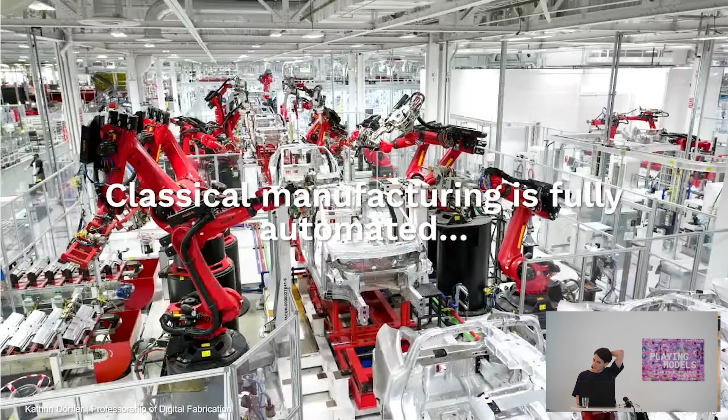This is an image that is often shown in our field, our role model of full automation. In building construction, the role model would be classical manufacturing industries, such as the automotive sector, where the production chain from design to final assembly is largely automated. We often put forward this picture as sort of what we want to achieve in building construction.

However, we've learned over the years that building construction is not directly comparable to classical manufacturing industries. The built environment is intertwined with the material reality of society and geographic locations to which it belongs. So it's more difficult to centralize, to streamline. It's dependent on availability and supply chains, as we heard yesterday from Mariana, on legal framework conditions which heavily inflict on it, as well as industrial practices, technologies, and skills so far.

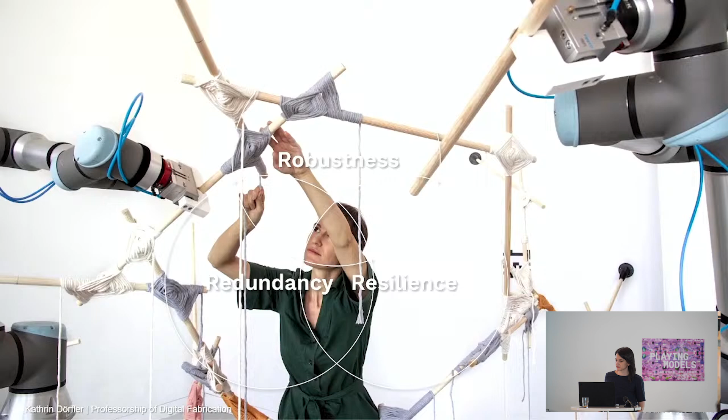So the research in my team tries to take a more nuanced take on robotics and automation for building construction. Also big words: robustness, redundancy, resilience, something that is underneath the projects we are doing. We're trying to understand how we can flexibilize processes, how we can make them not optimized but more redundant and resilient.

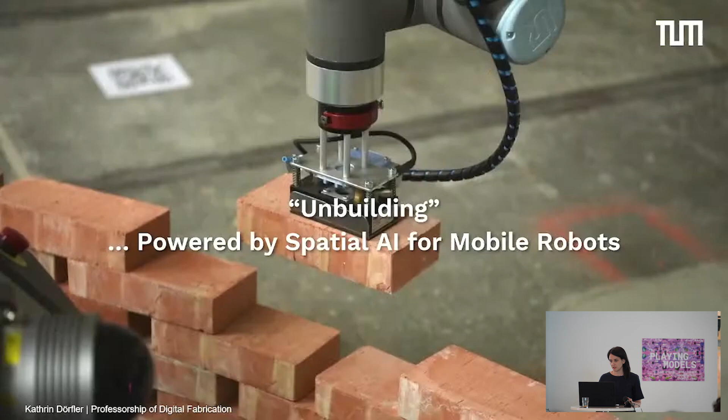And what I mean with this, I will show through a range of projects dealing with bringing humans into robotic fabrication procedures. I'll start this lecture with one very recent exploration we're doing. It's called Unbuilding, and it looks into how to carefully take buildings apart. It's a PhD topic of a researcher in my team, Begüm Saral, in collaboration with Stefan Leutenegger, professor for machine learning and robotics. The project started by observing typical end-of-life scenarios for building structures today.

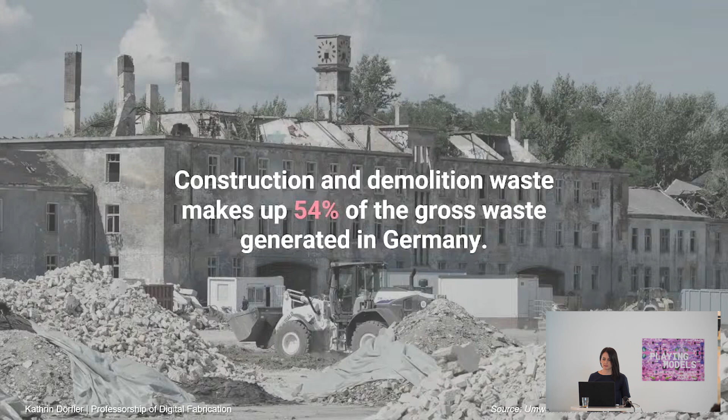I think we've also seen this multiple times: construction and demolition waste makes up a majority of gross waste. This specific number is from Germany, but I think this is a problem worldwide. It's a lot of building material that turns into construction waste and never gets another chance to be part of our built environment.

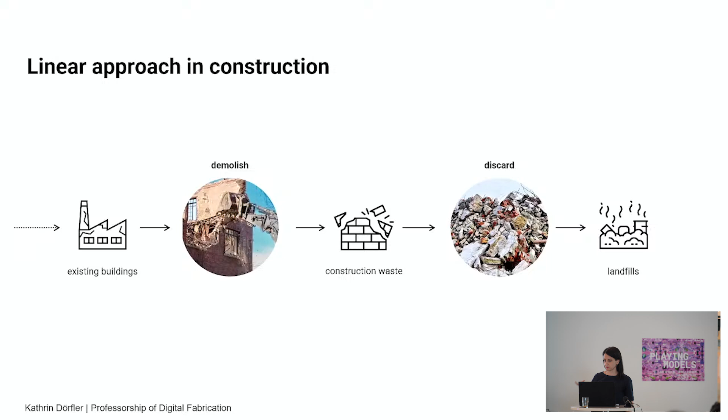Current linear approaches involve demolition with destructive machinery, resulting in large amounts of construction waste being discarded in landfills. This would be the linear approach. It's preferred today because it's labor and cost effective. However, it undermines the potential for reintroducing materials into the cycle.

So what if we would deconstruct our buildings with the same care and deliberateness as we construct them? And how could that help us reclaim materials in their entirety through disassembly, without actually destroying them?

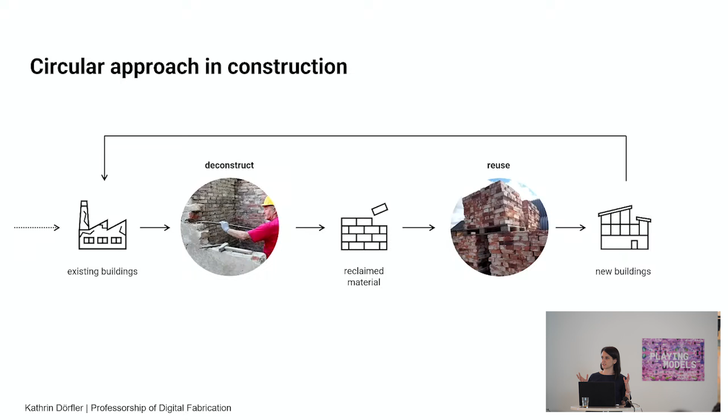This is very challenging, not only because of the robotic processes, but generally because our modern buildings are built very complex. They're glued, mechanically connected, and so on. So it's not very simple to do that.

And when we look back into history, before the industrialization of building construction, this was of course common practice. Salvaging materials and reusing them, especially in masonry and brick construction, has been a very prevalent method. The question is, how can we learn from this? How can we reclaim this, and how can robotics or digitization also help us do so?

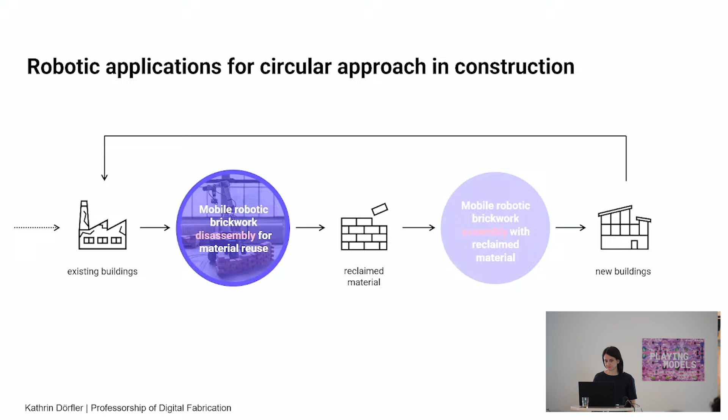So we have set up a very, very simplified case study, starting from very simple conditions, where we look into brickwork disassembly as a simple and maybe pre-industrial case for taking buildings apart. Then maybe later on we can see how we can basically take that material back into the cycle.

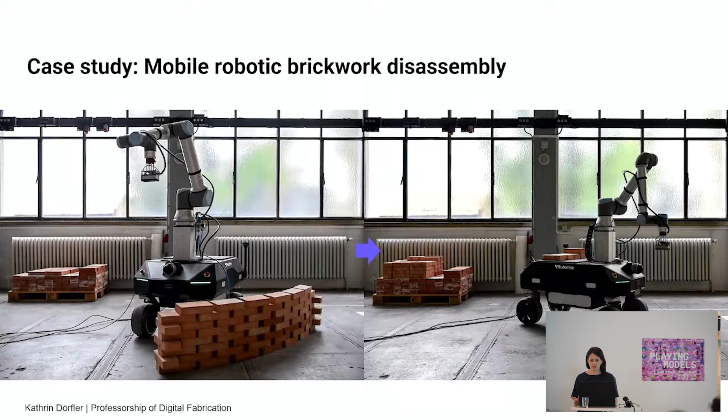So we've set up a very simple case with dry stacked brick, without any mortar bonding—just the mere brick. In contrast to a typical assembly scenario, where we have a digital model and a building plan, and make either people or robots construct buildings at very specified locations previously determined in plans, when we disassemble, we actually have to start from a place where we work with found situations and then derive actions from these found situations.

So something that later on, maybe, that's a speculation, could be helped much more also with large language models or visual language action models so far.

Anyway, we start simple, so we actually utilize spatial AI, spatial artificial intelligence, that focuses on understanding and utilizing spatial information, so geometric and semantic information, enabling robots and systems to comprehend and interact with the physical environment in a manner that mimics human spatial awareness. This makes it particularly fit for working in existing contexts, especially in found situations, where material reclamation and subsequent reuse could be utilized.

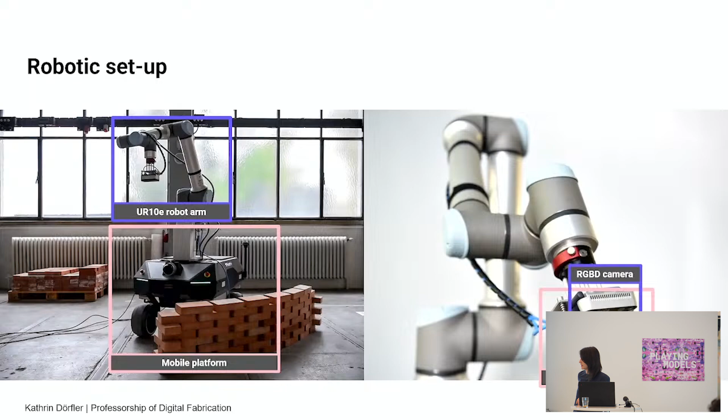So we have this mobile robotic setup. It's equipped with a eye-in-hand end effector, so a vacuum gripper and an RGBD camera. And it can detect bricks. Very simple, actually.

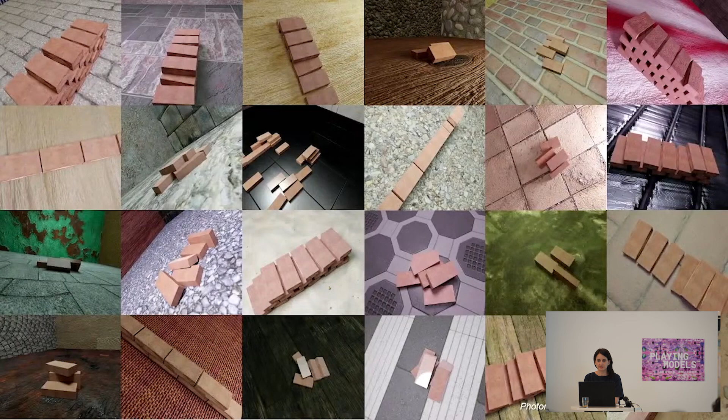This perception system is based also on learning. So we have created a photorealistic data generator pipeline where, instead of annotating real-world object poses, which is time-consuming and error-prone, we basically create synthetic data and learn from that.

And then we take this model to basically take the color data from the RGBD camera, which is fed into an object detector. It's segmenting the individual brick objects and then using the segmentation as well as the depth data to very precisely estimate their pose in space, which could be utilized in both static and dynamic mode.

This perception data goes into the robotic procedures or manipulation routines, where we have a two-step system. First, to get knowledge on the whole workpiece. And then actually, this works a little bit like this.

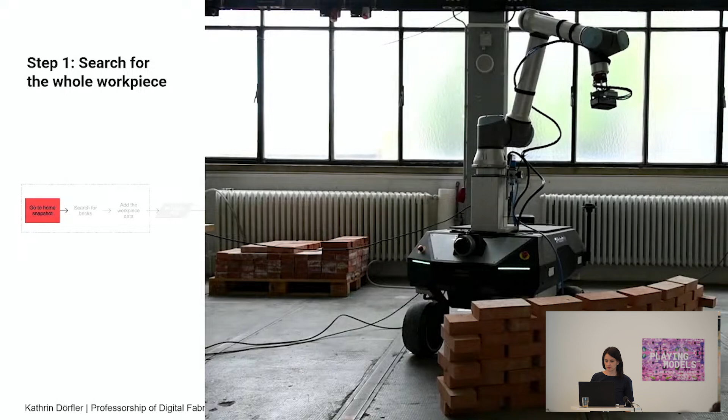So the robot is searching around, utilizing the perception system to determine the position of the workpiece relative to the robot, and then a more streamlined iterative process where individual objects are located, and then some reasoning happens as to which brick can be taken out of the existing structure.

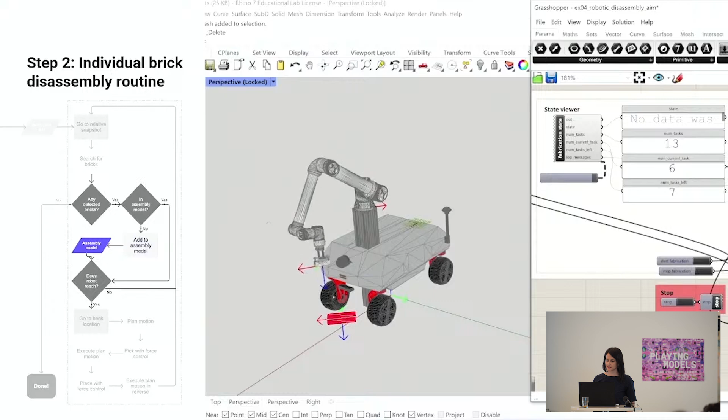So this is also kind of not very fast because we are also developing the system, but here you can see the detection of a single brick, and the pose estimator is triggered to retrieve the poses of the bricks in its vision. Upon detection, found bricks are added in real time to the digital twin, which serves to track and store the detected and disassembled bricks in their as-found locations.

If the robot assesses whether it can reach a brick, it moves to the estimated pose. Then a planning request is initiated to a motion planner, and the most effective trajectory is chosen to be executed.

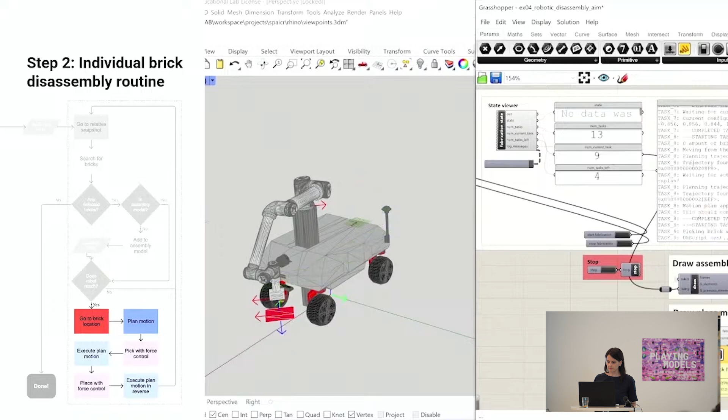The robot arm moves in the Z-axis utilizing force control also to then grip the brick until a contact is made, and then relocates it. So very subsequent steps that are necessary to do so.

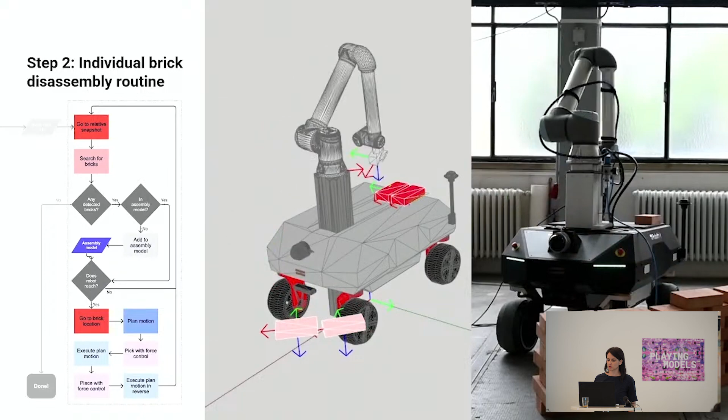And then this process repeats as more bricks are detected and localized until the robot collects all the bricks within its static reach. So during this process, within the planning scene, bricks are also systematically removed from found locations and added in a storage.

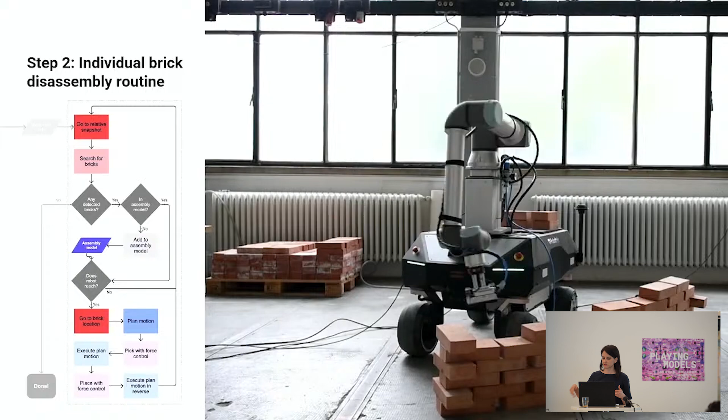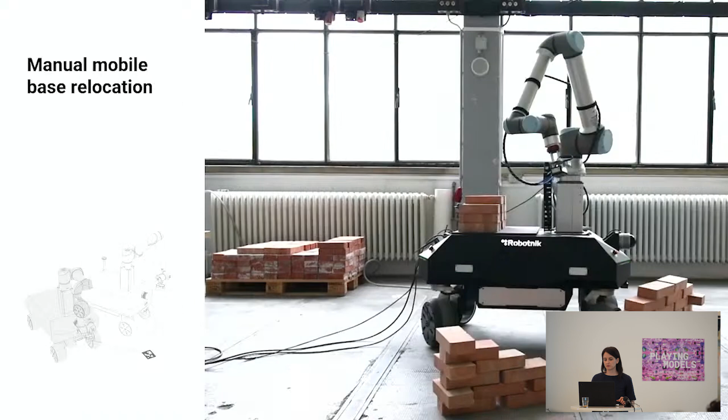So now this is on the back of the robot. But as this loop continues, basically until nothing is reachable anymore, then we relocate the robot, which is done manually, where we use a fiducial marker to localize, and then basically by relocating it multiple times, this whole wall can be disassembled.

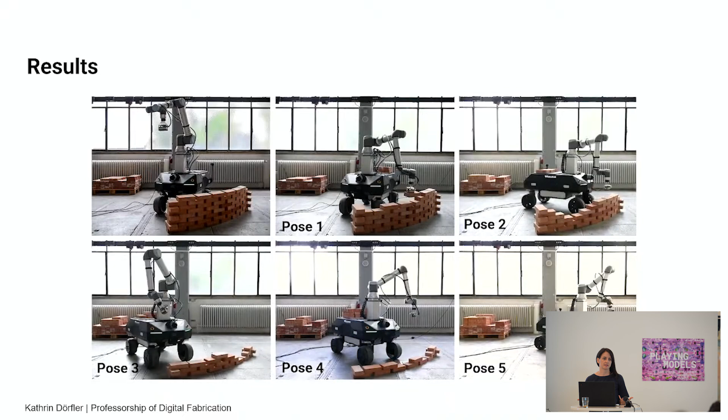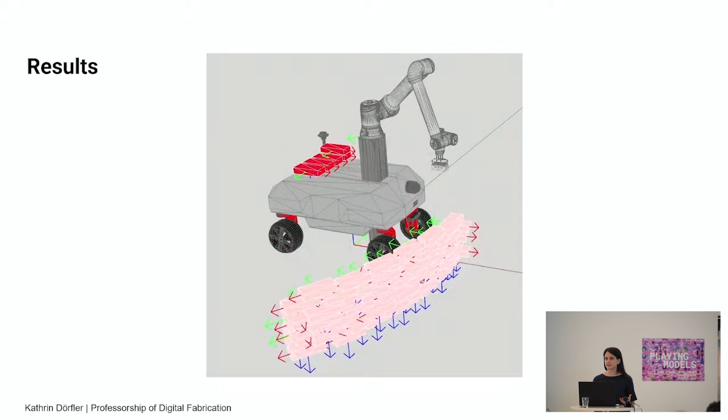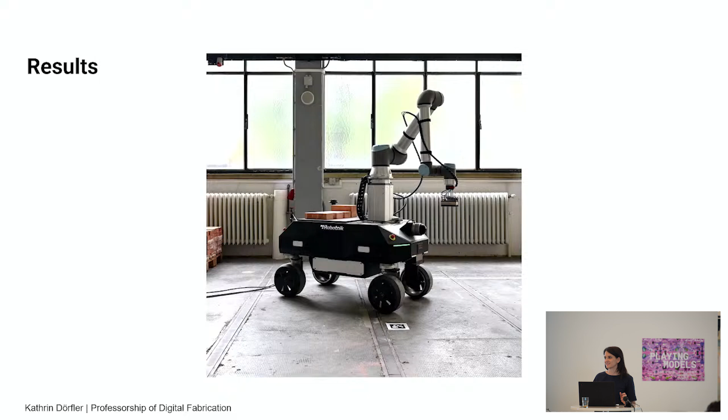Following this methodology, a digital twin is generated as a result of this process. So actually the reminiscent of the building is the digital model, even when the physical structure itself no longer exists. This is something very nice conceptually, that we build this up as we take a building apart. Potentially this would be possible to reuse if you want to reconstruct it in the same way.

Some technical aspects. Since we used, for the first time, machine learning models to classify the bricks, we learned that it's extremely robust, and it's also possible to extend the catalog of classifiable objects to different sizes, different colors. So we are not very constrained in that.

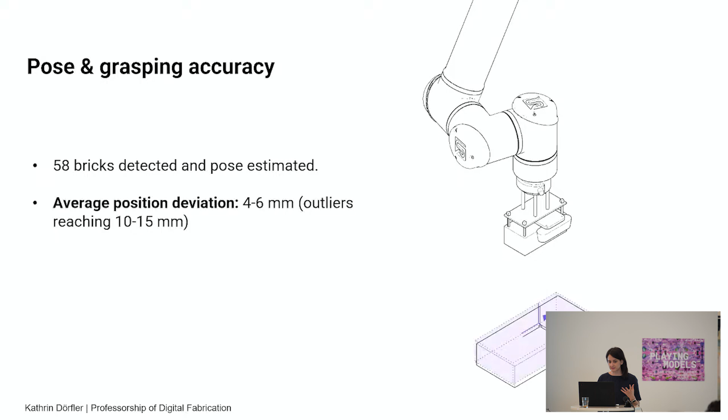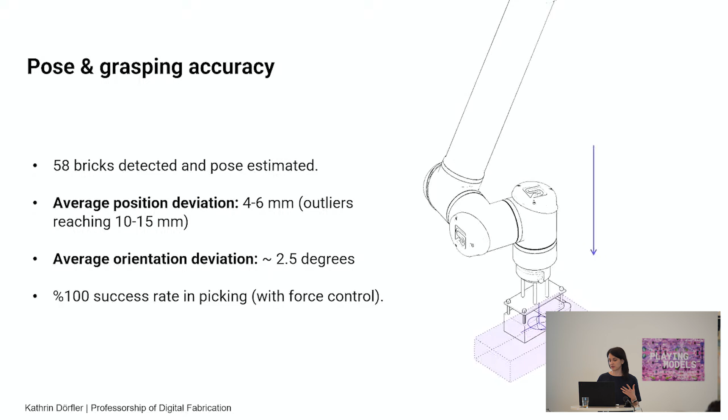There are, of course, outliers in the pose estimation, but even that is extremely precise as compared to previous methods that we have used. And there's actually a 100% success rate in picking. It's a very simplified case, of course, but it's very nice to see how well these models also perform in terms of the robustness of the system.

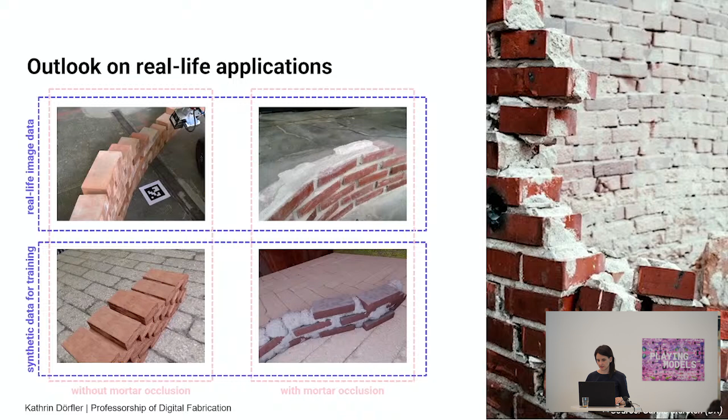The next step we are working on is to create synthetic data sets that also take mortar occlusion into account. So how can you detect objects which are partially occluded, fully occluded, or broken, or don't have the same geometry as in the model? The routines for how this can be done also become more complex, and we are also trying to look into this.

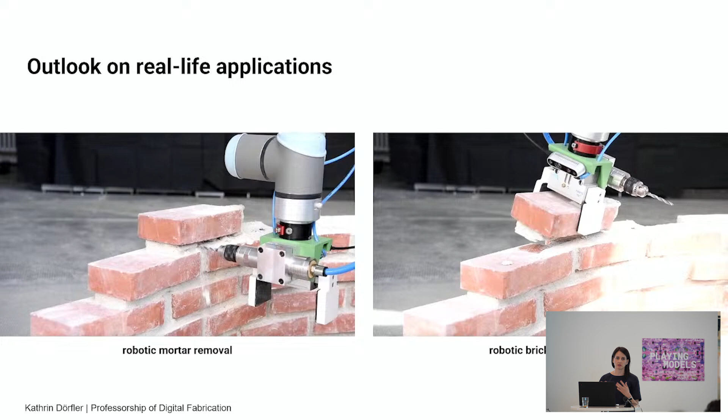We are also trying to look into action models to derive actions with the help of AI. So spatial AI, or visual perception in robotics and machine intelligence, gives machines the possibility to understand their context, to reason, and to derive actions from them.

So in essence, it gives a substantial level of autonomy to operate in unknown environments. Typically this is used to lower the interaction with people, because machines can operate fully autonomously. But what it also enables, if there's a high level of autonomy, is that it actually increases the opportunities for interaction, also interaction with humans. This is a nice side effect which allows us to look more into possibilities of how to interact and cooperate with robots, mechanical machines, and computational processes as such.

I would like to step back to a work I have been doing here at Gramazio Kohler Research before I left: augmented brickwork. You will see a lot of bricks - just bricks, but you can do a lot with them, which we have been doing now 5 years ago in collaboration with a Greek contractor. It looks into a very similar approach, basically hybridizing machine intelligence with traditional manual building techniques.

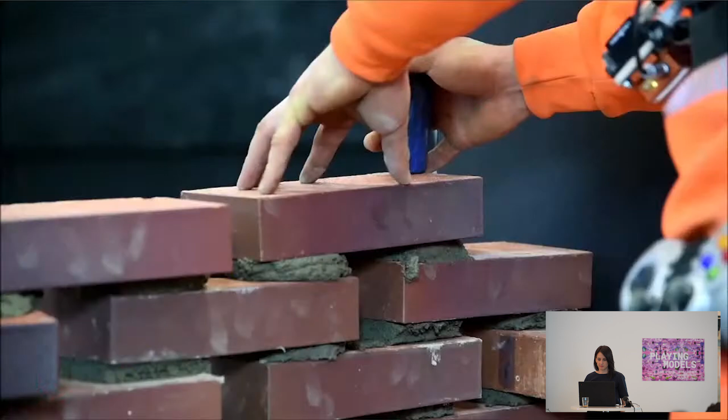We have been combining this with traditional masonry, and you can see how brick and mortar construction has very distinct principles of how to manipulate objects. In this case, it's really knocking the brick into the mortar bed, which allows you to very finely adjust the 3D location of this object. We have used exactly that principle to measure it.

We translate that measurement into real-time visual feedback and real-time visual instructions. So you don't only project a digital model into 3D space, but you measure what is actually in 3D space, and you can update the instructions very precisely and intuitively in real time. It's very hard to explain - I think everybody has to try this once, otherwise it's difficult to explain, but it becomes a very intuitive and augmented process.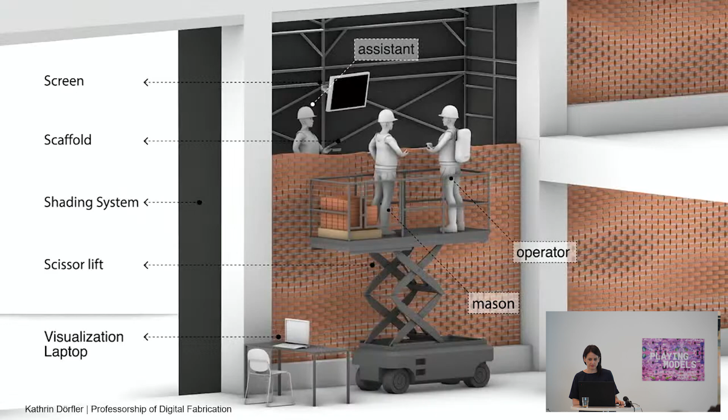We developed and tested this for the construction of a brick facade for a winery in Greece, where we scaled up the system for the construction of, I forgot, 15,000-something bricks. Fields 5 by 5 meters, infill masonry, not load bearing, but infilled into concrete frames. We basically developed a two-person system.

Initially we intended a one-person system, but we couldn't. So there are actually two people: one holding the sensor and all of the equipment, and the second one laying the brick, with a turn-taking scenario where cleaning the mortar joint, bringing the mortar, and so on are shared tasks. This is summarized in this video.

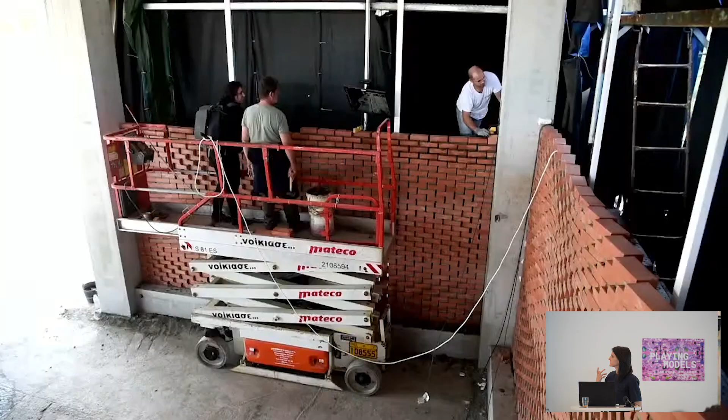You can see here - it's very similar to, if any of you know, the winery of Gramazio in Gantenbein. It had the same sort of idea of having individual rotations of brick in space to create some differentiality in the facade, just that it was not prefabricated, it was built on site, and it was not glued, but mortar was used.

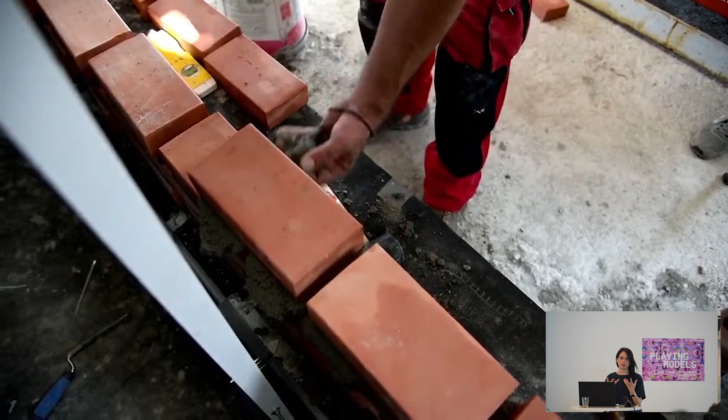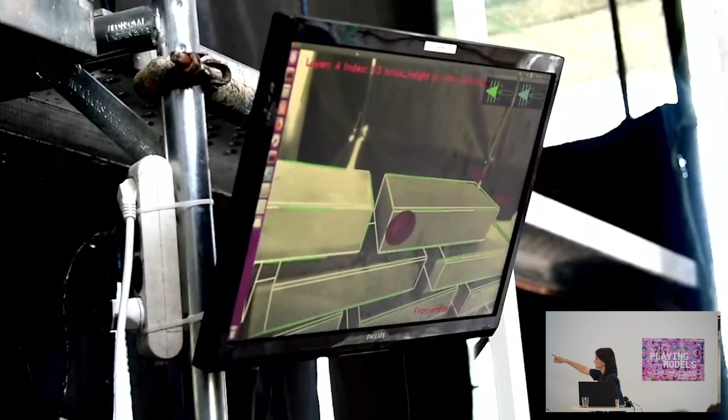This mortar joint is quite thick, like 3 to 5 centimeters, so it's really used to also give the possibility of spatial orientation in the bricks. The joints are also not linear, they're a little bit curved, to give more differentiality. Here you can see these little red dots, arrows - these arrows indicate where you should knock the brick.

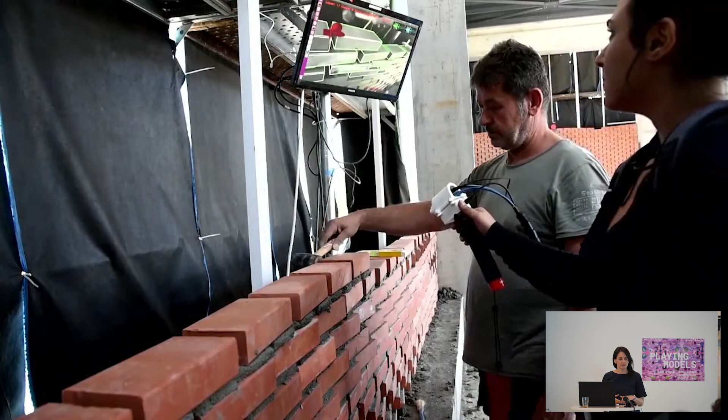So it's not just the outlines that are given, but it's kind of given what you have to do. And it's a very, very simple thing, but it has proven to be extremely effective, because it's minimal information at the point, at the time where you need it. And also it's something that you learn over time.

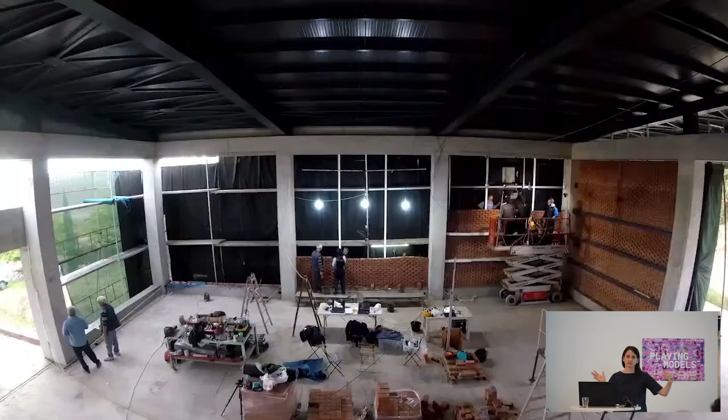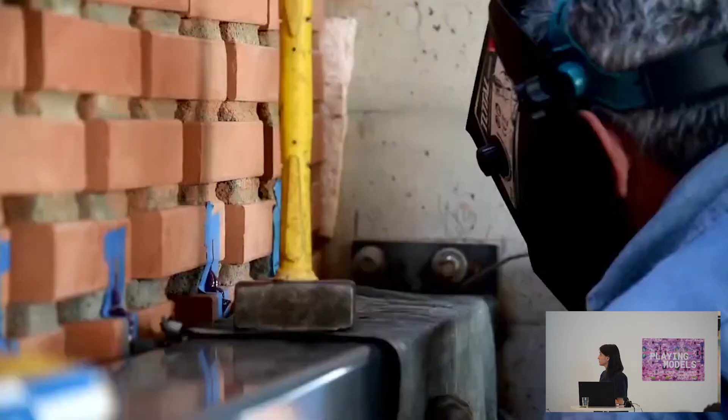I don't have the numbers now, but basically for constructing one of these infill masonries, the first one took probably five times the time than the last one, because it's something that you kind of also learn over time. And you can see here, it's largely dexterous and also crafty.

So the trust from the masons came only when they saw the first two or three fields together. They kind of understood that what they are doing is actually really having an effect on the larger scale, because it's so small on the parts where you operate.

And also, it's a flat wall, but really it allowed to give this three-dimensionality somehow, just by this very little tweak to have the mortar joint a little bit thicker in space.

So departing from this project where humans are given basically robotic precision and are informed about how and when to carry out building actions, it's very easy to bring robots back into the picture, because they share this digital physical workspace. So we have been working together with Daniela Mitterberger, who I have also already worked with on the augmented bricklaying.

We have been iteratively creating a few projects, I will show one now, where we try to look into turn-taking task distributions between humans and robots, and what is sensible for humans to do, what is sensible for robots to do, and how can they meaningfully act together.

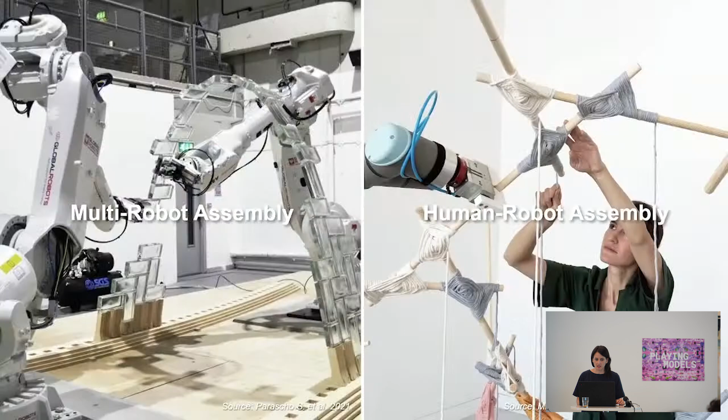Of course, there's a lot of research also in multi-robot or human-robot research. The effectiveness comes when multiple agents can do more than what a single can do alone, when there's some sort of support from each other, and also some sensible distribution - what neither humans nor robots could do independently. So this would be kind of the objective.

So now when we design for human-robot cooperation, we have to take this task distribution into account while designing. The affordances of each have to be somehow known, or the design constraints should be there to know what can be done by each of them.

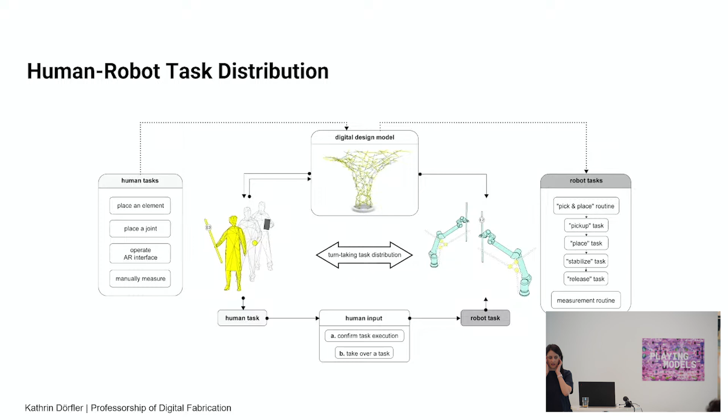So we can model this. But then also during assembly or building, you actually want to allocate the tasks quite flexibly and meaningfully. So it's easy to trigger robots, but how you communicate to people is still a little bit unknown, let's say.

And in the research that we have been pursuing, we largely use mobile phones because it's somehow the easiest to take out of your pocket and kind of log in, log out.

In this specific experiment, we developed what we call assembly grammar, which means we define not the product but the process. So we represent the process geometrically or computationally.

In this case, we worked with reciprocal frame structures, so we always have a starting rod. The first one is placed by a robot, the second by a human. And this is kind of turn-taking, growing along arbitrary shapes - in this case, sort of an umbrella shape.

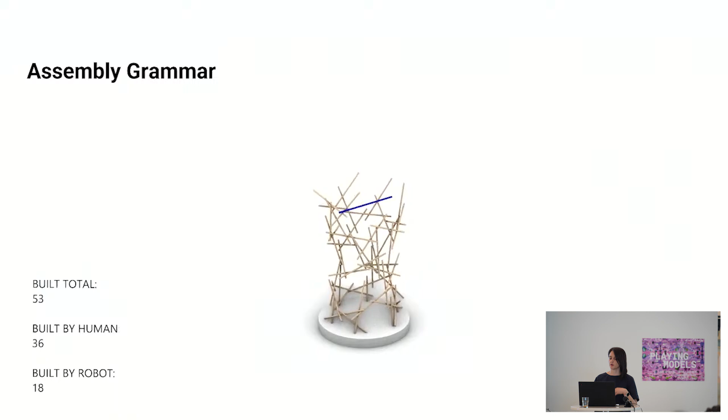Of course, then you can do some sort of optimization on top of it, simulating what would be the fastest or the most collaborative, depending on how many people or robots are participating. You can take structural stability into account, and also basically take the fabricatability and the structural integrity of the structure into account at every step.

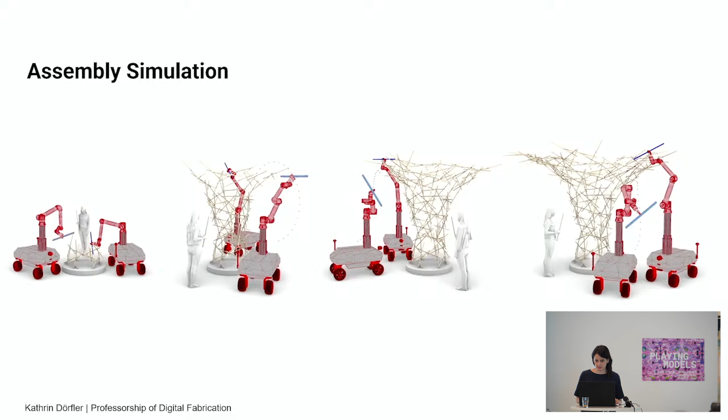So you don't need to post-rationalize. You have all of these factors already in your form-finding or form generation. Then we store this information in assembly information models.

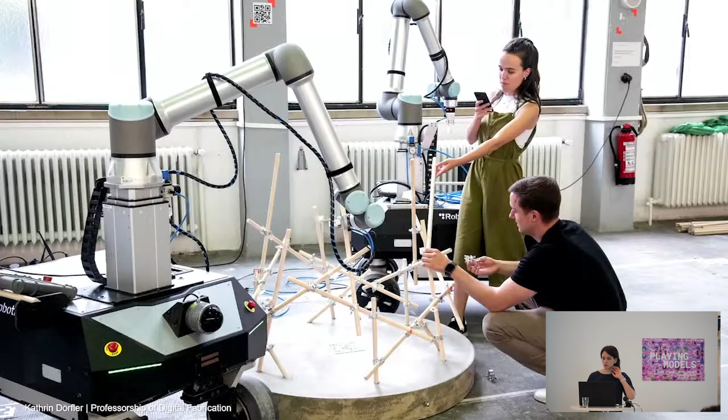During building, in the last experiment, we went back to tag tracking because it's so simple. We localized the mobile robot plus the phone to the same markers in the environment, and that allows us to co-locate multiple mobile phones and robots in the same work area.

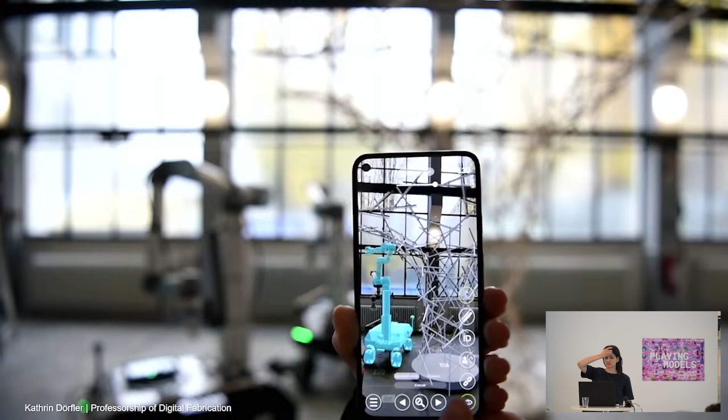Here's also a little snippet of how this is working currently. It's not very streamlined, still very sequential. Robot actions need to be really simulated and triggered, so it's not extremely intertwined yet. But the objective or the vision would be that all of this happens automatically, is tracked automatically, and happens simultaneously.

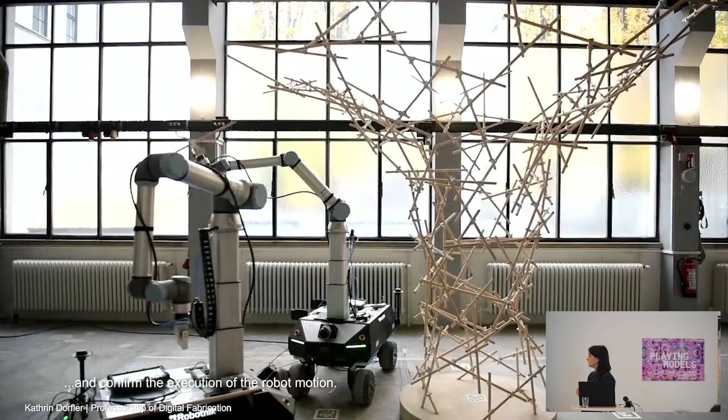Currently, we can, for instance, preview a robot movement or motion, and then trigger it such that it's executed. Then the human would be informed that the next element should be laid, or the mechanical connectors should be laid, and then the next element should be laid.

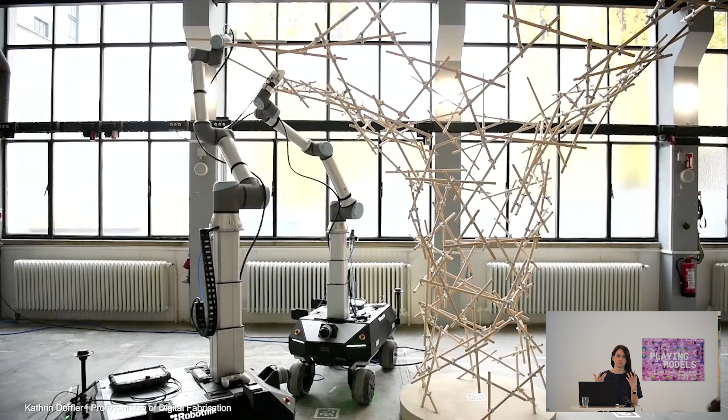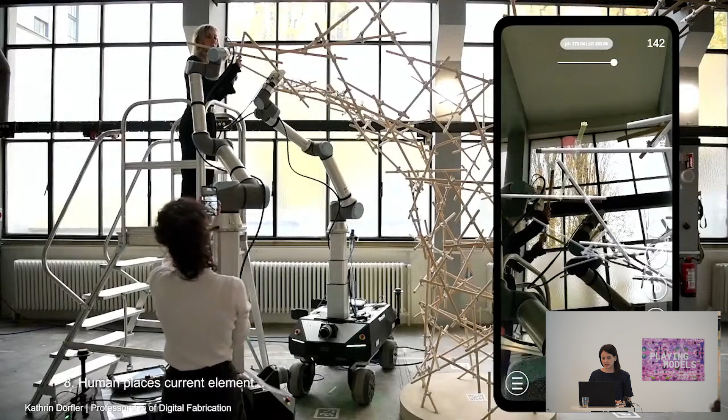So while one robot is holding, the next one is coming. And then of course we would want to have this not be about following specific actions, but about having priorities where you should continue. You should be able to basically log in, log out, and participate where it's meaningful, as you would in a normal building construction. And the digital model is always updated and synchronized, so we always have an updated, very high resolution version at every step of the process.

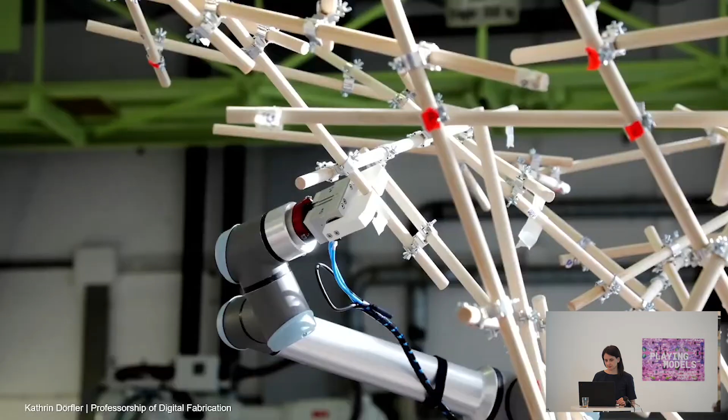So here's some impressions. This is the first sort of tiny umbrella structure that we built. This was for the Future of Construction workshop last year, so it's a workshop project.

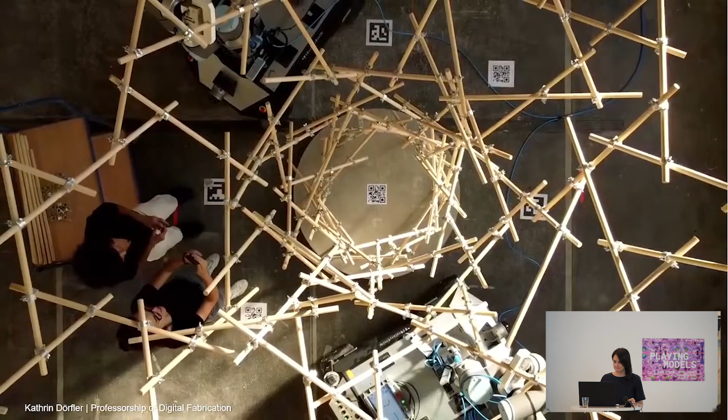We have been taking it apart—it's the same sized element and the same sized connector for these structures. And we have been rebuilding it recently at the RobArch conference in Toronto together with our team and the team of Daniela.

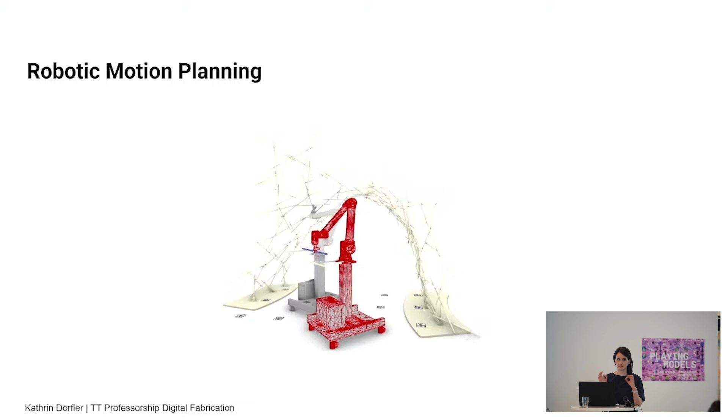In this case, really looking into stabilization as a design constraint. So the robots stabilize at critical points so that we can also have more freedom in what we can build. And this is the final outcome of this experiment.

And we have also tried to do this again, coming back to brick, in multiple other scenarios where a distribution of tasks would make sense—again, this kind of who works with more malleable material and who works with more precision. Very simple distribution, but somehow proves effective for research.

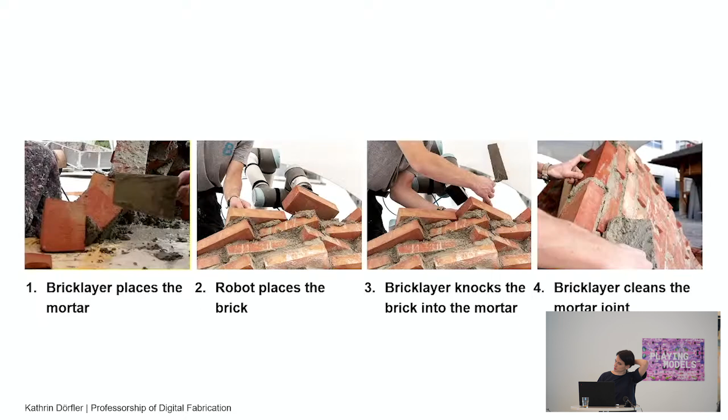So the bricklayer places the mortar, the robot places the brick. The bricklayer knocks the brick into the mortar, and the bricklayer cleans the mortar joint. This is a little installation that we worked on with masons, from a mason school.

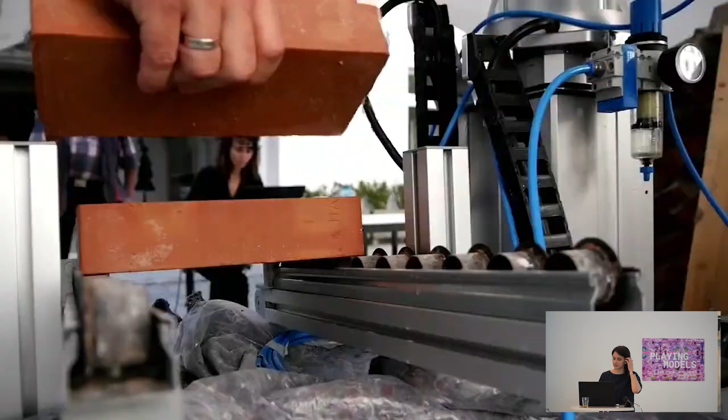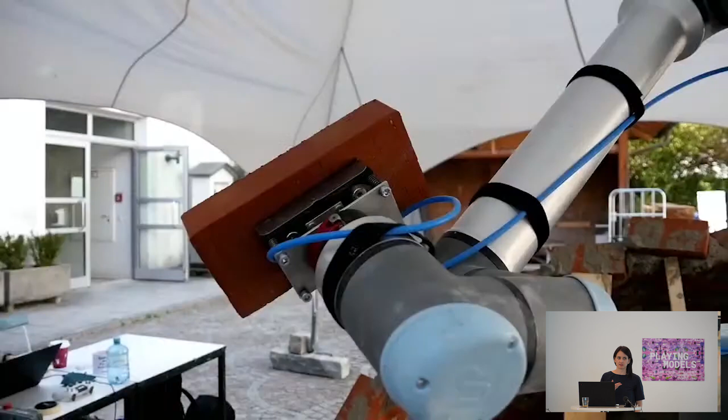So also something that we try to do, not to just stay in the academic circle, but really work with traditional craftspeople. Here you can see one craftsperson basically operating in the same workspace. Of course, there are all of these safety things we have to take into account, so going very slow currently, but you really want to have them blending in very naturally into the process.

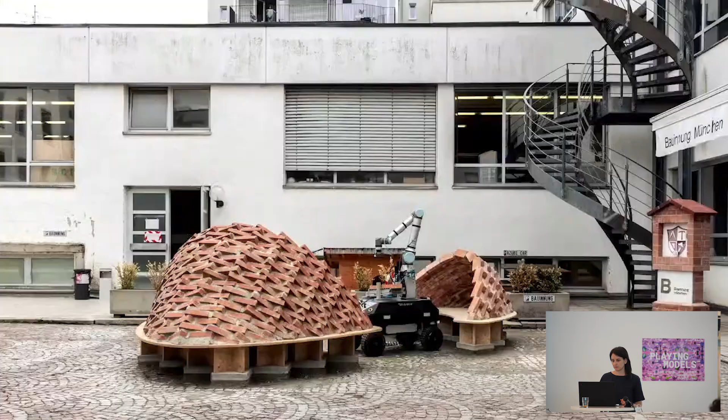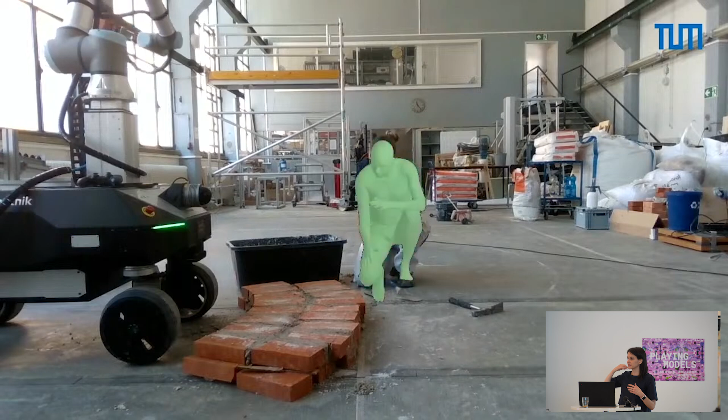This is one visualization of the outcome. Coming back to spatial AI, we can track objects, but we can also track humans. So it's really nice to think about how we can take human models into account so that we can have action recognition and action triggering done automatically, so we don't need to do this actively, but that it really becomes a smooth operation.

And very recently we have started to look into human motion capturing and human action recognition, so that this would allow us to track and trigger robot actions automatically.

So in conclusion, to wrap it up, I would like to iterate a few points. Not very articulated yet, but we are looking into what alternative vision we can work on as opposed to full automation—hybrid human-robot work teams that complement each other to increase flexibility, freedom of design, new areas of application, and to some extent sustainability, although we don't know what that really means in that context.